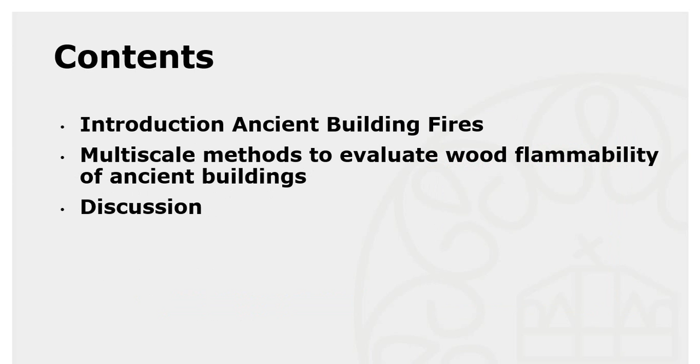My presentation is to evaluate the flammability and the fire behavior of wood of ancient buildings. My name is Qiang XU from Nanjing University of Science and Technology from China. This is the contents of my presentation.

Wood is one of the main building materials of ancient architectures. The frequent ancient wooden building fires cause tremendous losses to the building itself and the cultural relics in the buildings. Exploring the law of fire occurrence and development in ancient wooden buildings is of great significance to ensure the safety of ancient buildings.

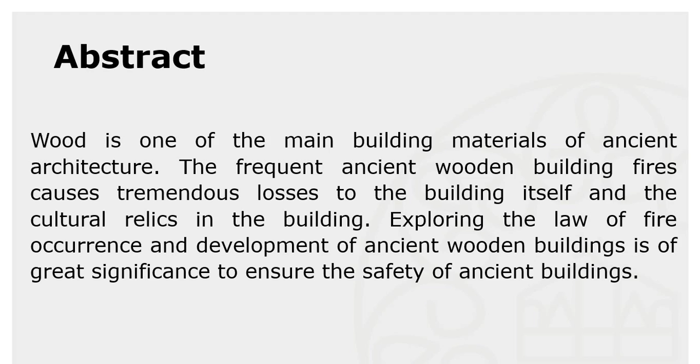In the past 10 years, China has received a total of 392 reports of ancient building fires, and ancient building fires are also frequent in the world, resulting in very great losses. Most of these fires are caused by the wooden structure of ancient buildings, and eventually burn the whole wood structure, destroying irrecoverable historic remains.

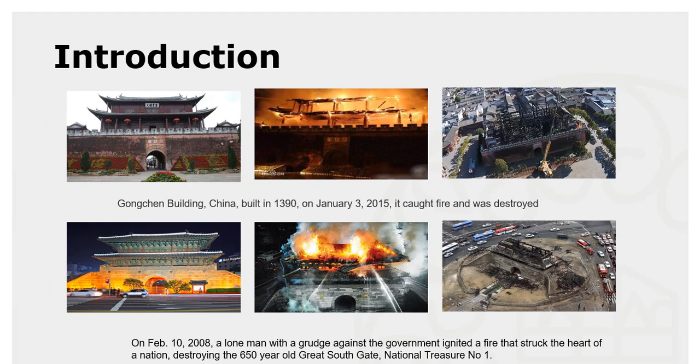For example, the more than 600 years old Gongchen building in China and the 650 years old Great South Gate, which is the first national treasure of South Korea, were all reduced to ash in the fire. The fire in the Brazil National Museum not only destroyed the historic museum buildings, but also destroyed 80% of the precious cultural relics, which is a catastrophe in the history of human civilization.

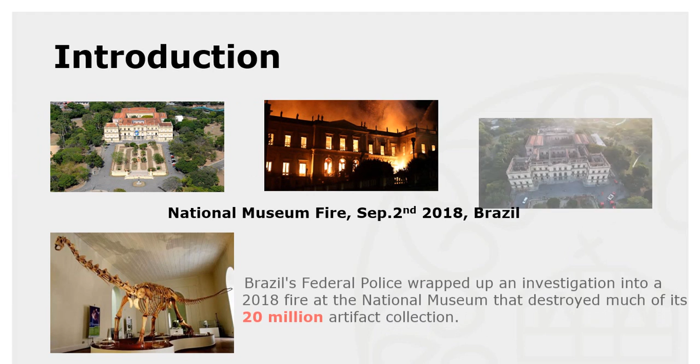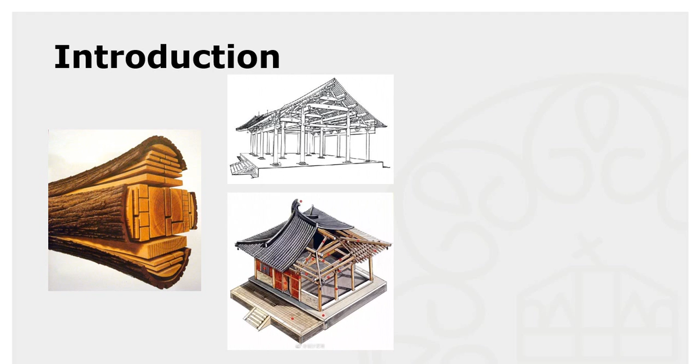Wood is the most widely used material in ancient buildings, and it is very convenient to obtain and process. But the disadvantage is the wood itself is easy to burn, and it is not easy to put out once it catches fire. Therefore, it is necessary to study the correlation between ancient buildings with wood structure and fire.

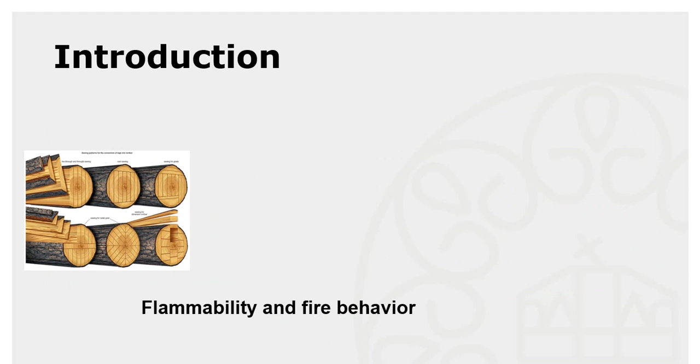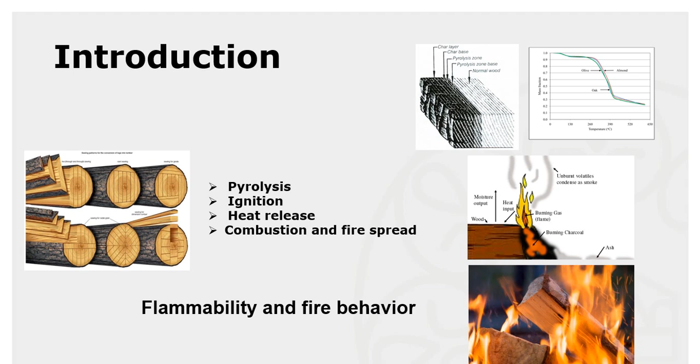To study the flammability and fire behavior, it is necessary to study its pyrolysis and heat release mechanism. We are concerned about the following issues: pyrolysis, ignition, heat release rate, and combustion and fire spread.

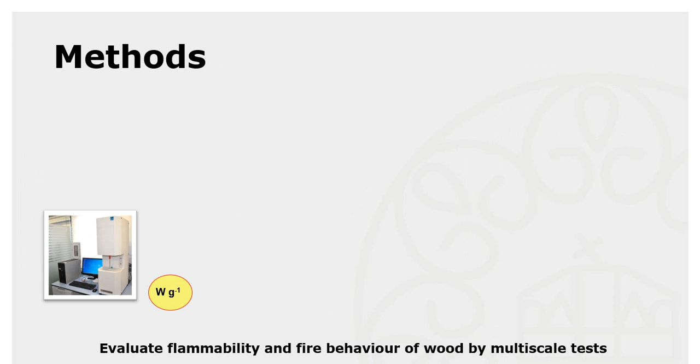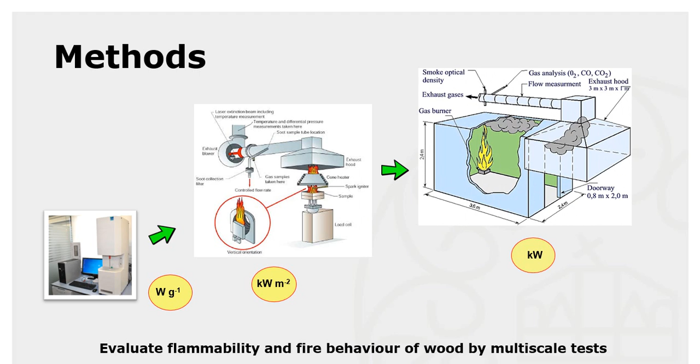We adopt the multi-scale method to study the flammability and fire behavior of wood. We use micro-scale combustion calorimetry in the micro-scale test, and for the bench-scale test, we use cone calorimetry. And for the room scale, we use the ISO 9705 room. The heat release rate, combustion heat, and heat release capacity of the small samples can be obtained by the MCC.

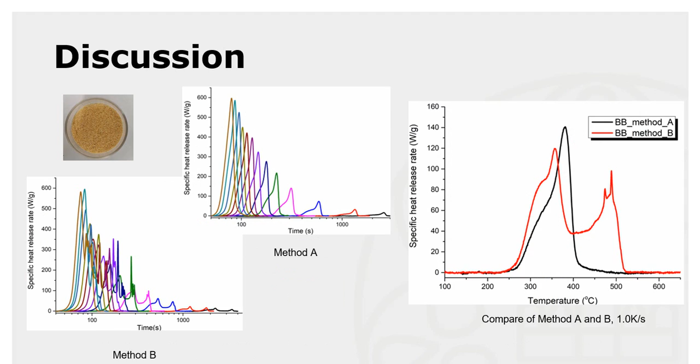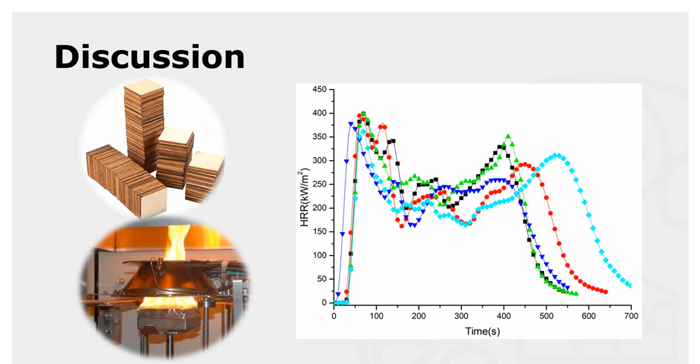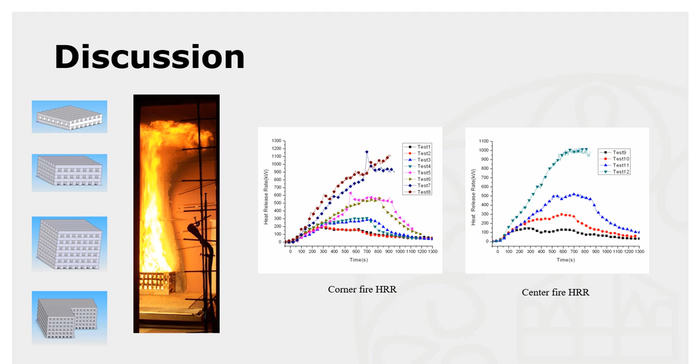The ignition time, heat release rate, and the minimum radiation flux of the wood can be obtained by the cone test. And also, we can use it to determine the flashover categories of the wood samples. According to the ISO 9705 rule, it is important to know parameters such as the heat release rate, total burning heat, and the flashover time of the wood, which we can determine from the test. These multi-scale methods can conduct a comprehensive study on the flammability and fire behavior of the wood.

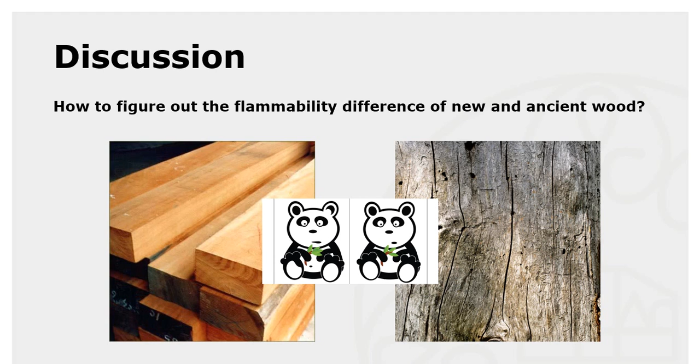But the wood in ancient buildings has undergone a long aging process, which is significantly different from new wood in flammability and fire behavior. This is what we need to do in the future. Our research will analyze the differences in flammability and fire behavior between new wood and ancient building wood from the following four aspects: the change of components, the difference in density, the balance moisture content, and the difference of the internal structure and internal specific surface area.

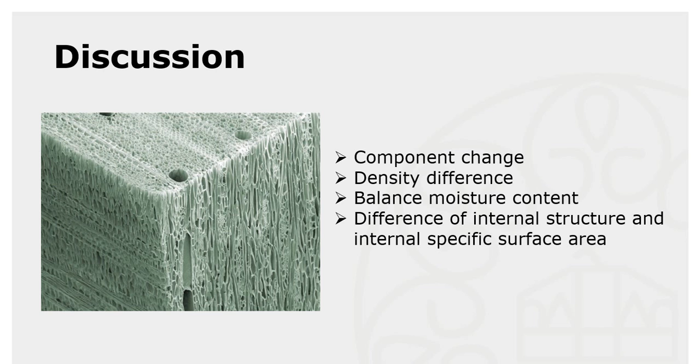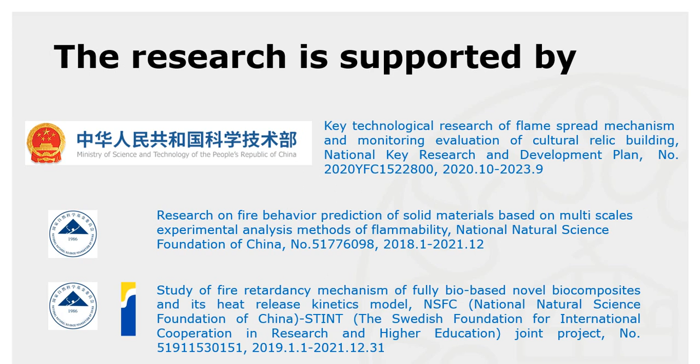And our research is supported by one national key research and development plan and two national natural science foundations.